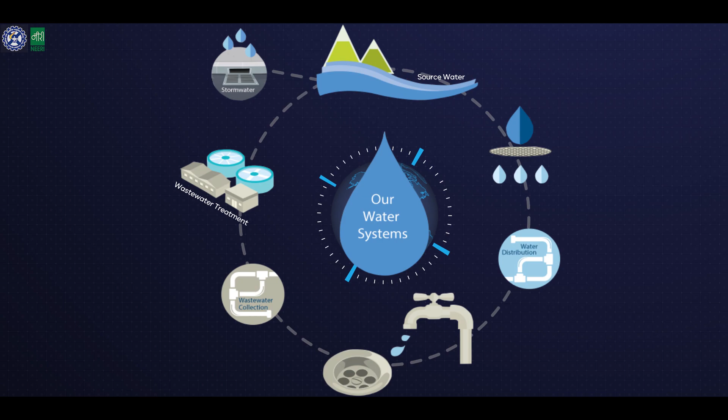Safe drinking water is a basic need to sustain human lives. To provide safe drinking water, we need a sustainable ecosystem in place. It includes raw water source, collection system, purification plants, storage facilities, and water distribution network.

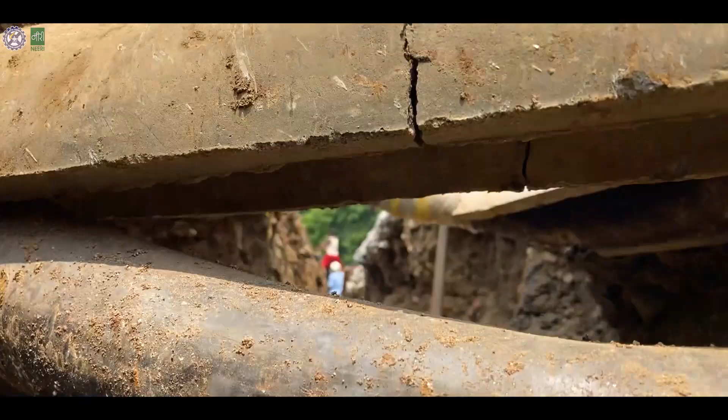Water distribution network in many cities is hundreds of kilometers long and is laid underground for several decades. Aging distribution network consists of various issues like corrosion, breakages, and leakages in pipes. Failure in distribution network causes loss of revenue to all the municipal corporations and water boards.

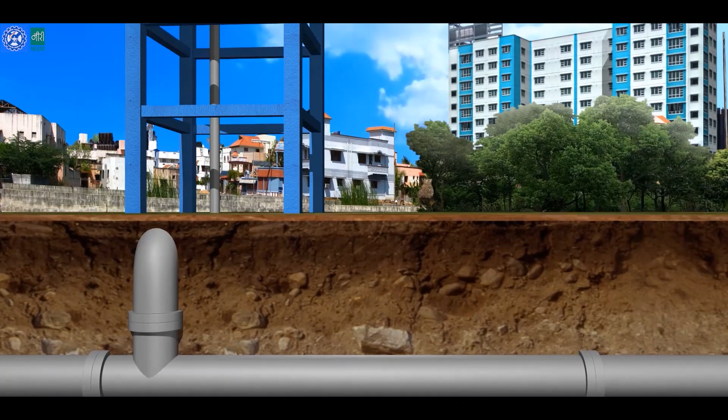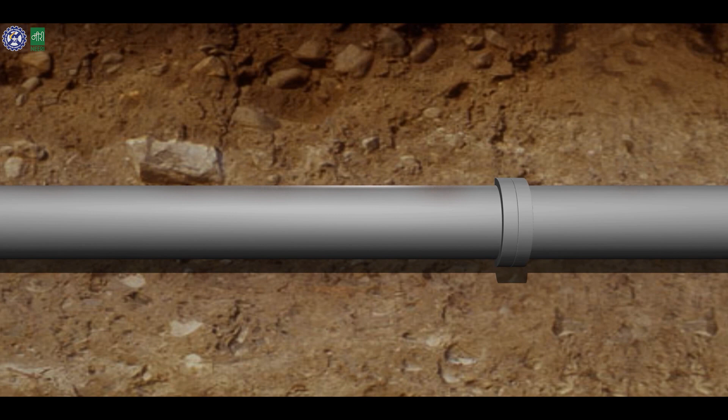Drinking water supply pipes are placed approximately 1 to 2 meters below surface level, while drainage pipes are placed approximately 4 to 6 meters below surface level. Due to soil and environmental conditions, these pipes get corroded. Their joints become loose, which makes them vulnerable to breakage and leakage.

Many municipal corporations in India have 40 to 60% non-revenue water because of leakage, breakage, and some other reasons. Due to lack of revenue, they practice 2 to 6 hours of intermittent water supply. Rest of the time, pipes stay empty, creating negative pressure, which results in contaminant intrusion into the water distribution network.

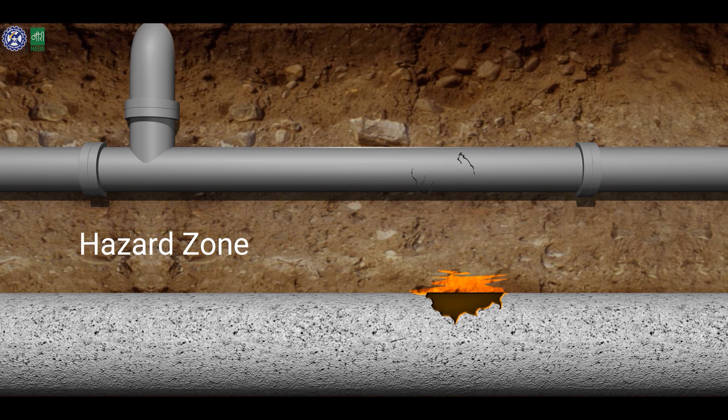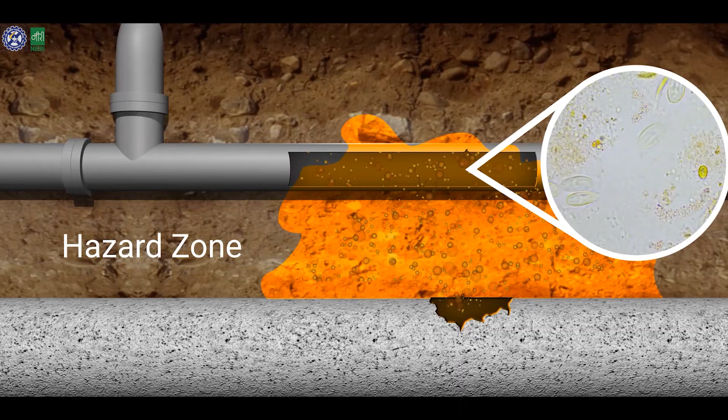The area affected by leakage of sewer lines and drains is known as hazard zone. There is a possibility that drinking water pipes may pass through the hazard zone. If there is any breakage or leakage, the chances are contaminants from hazard zone or other impurities present in the soil may enter into the water supply pipes during empty hours, resulting in supply of contaminated water, which gives rise to public health issues and ultimately results in loss of processed drinking water.

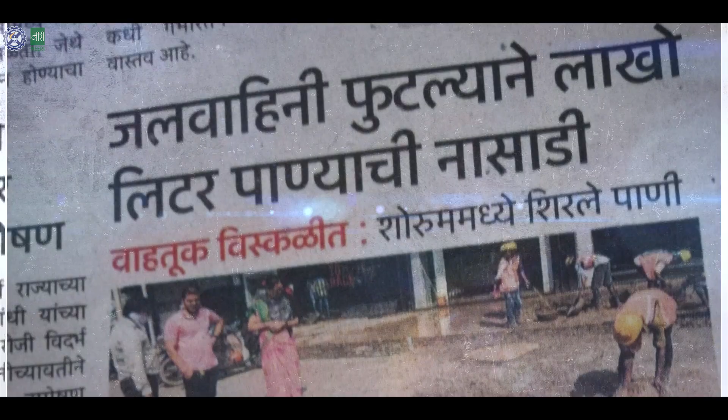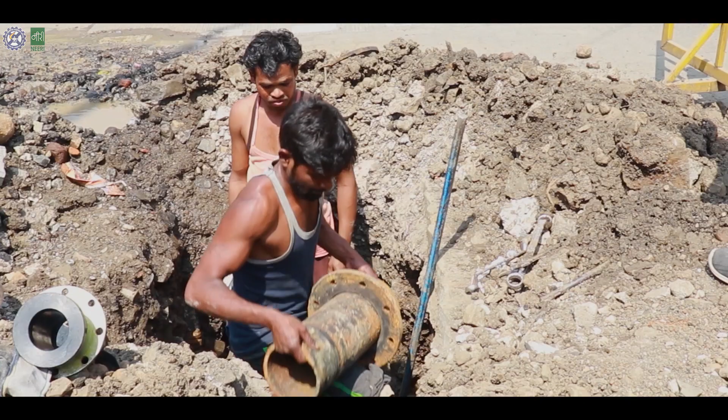At present, the municipal corporations have a lot of burden to maintain their water supply network. The approach they are following is a reactive approach. Whenever there is a complaint of leakage or contamination at the consumer end, they replace the pipe or they rehabilitate the pipe and they solve the problem at that level. There is no mechanism to identify the point of contaminant intrusion into the water distribution network.

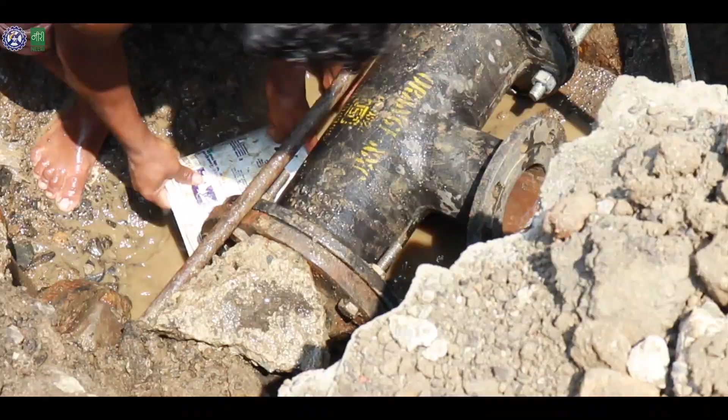Most of the time, corporation engineers are struggling to locate the source of leakage. There are complaints of polluted water supply, but for days together, they are not able to trace the source of the contamination. Most of the data that we have, we find that is inadequate. The condition assessment of the main pipelines is a big challenge, which comes out with an assessment of how much of the pipes are to be replaced, how much of pipes are to be retained.

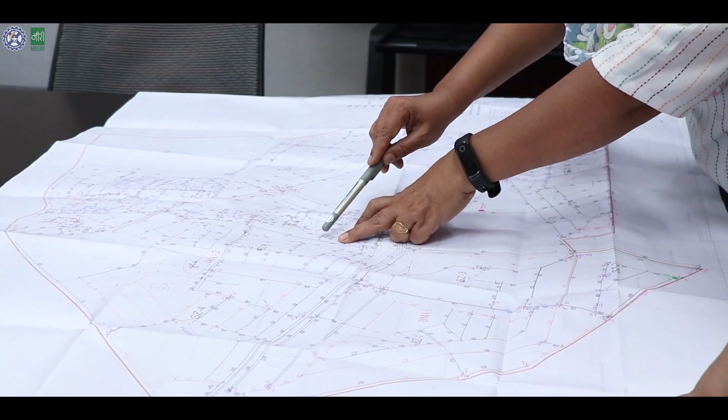So here we need to use such tools which will improve the service delivery as far as water quality and quantity is concerned. To address this issue and simplify the administration process of water distribution network, CSIR NEERI developed a software, RiskPiNet 2.0, a decision support system which is transparent, faster, and effective.

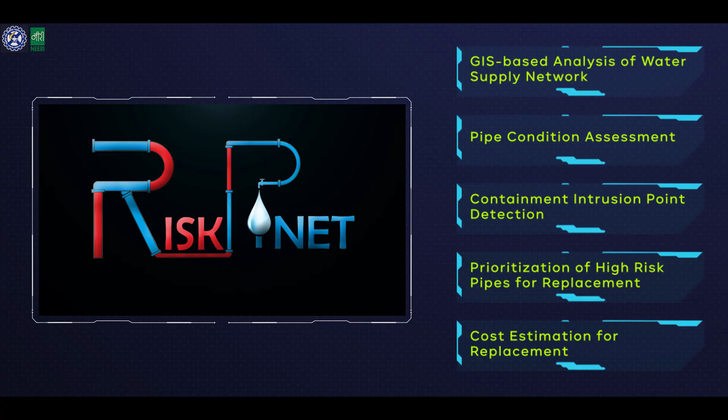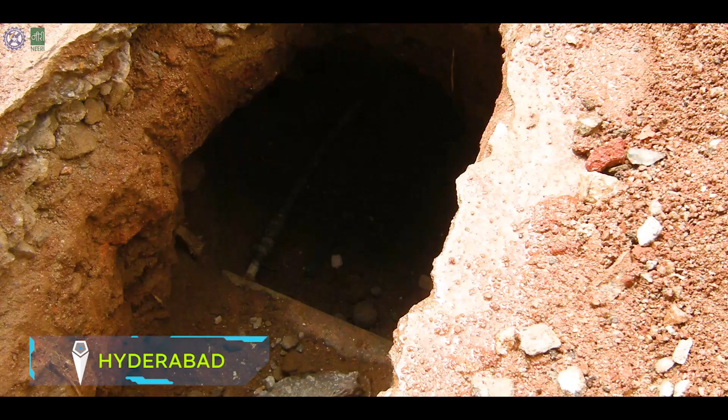NEERI is working on water distribution system since a long time. NEERI also designed water supply system and wastewater collection system for some of the cities in India. In Hyderabad, there was a problem of contaminant intrusion into the water supply network. It was thought that the entire water distribution network has to be replaced. But replacing the entire network is a huge task for cost and time consumption, and therefore development of water safety plan study was given to NEERI.

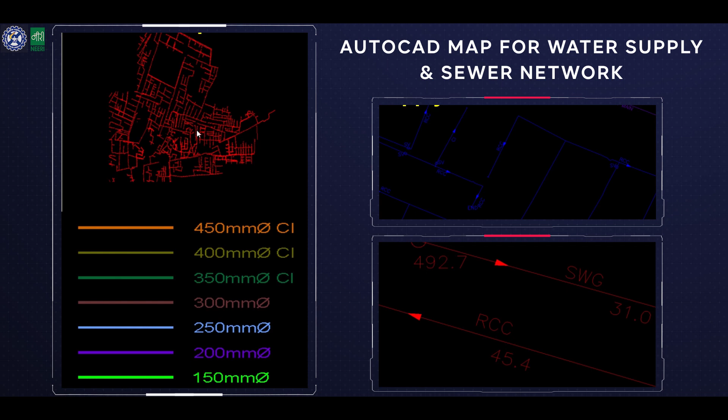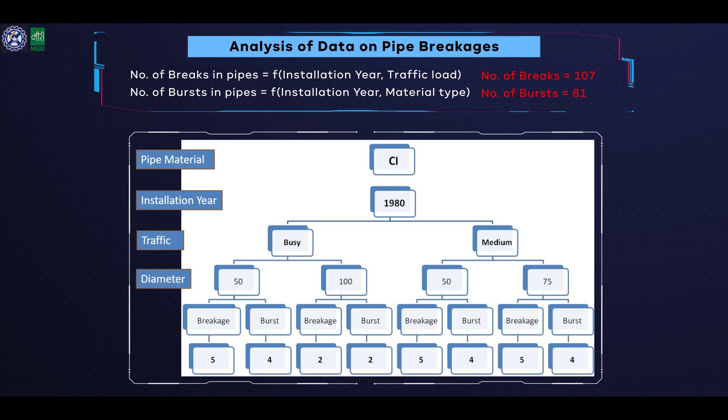And then we have studied the water supply network in Hyderabad. You can see we have taken GIS maps of water supply network, sewer network with different pipe material and diameter, and a lot of attribute data was collected and this was put to GIS analysis. We have done ground truth studies also for verification of data, and we identified the critical pipes in the pilot area which need replacement on priority.

And based on this study, we suggested a replacement plan to Metro Water Board. This study was very much appreciated by the Managing Director of HMWSSB at that time, and he said yes, this type of studies are very important and all pipe replacement programs should be formulated based on this type of study.

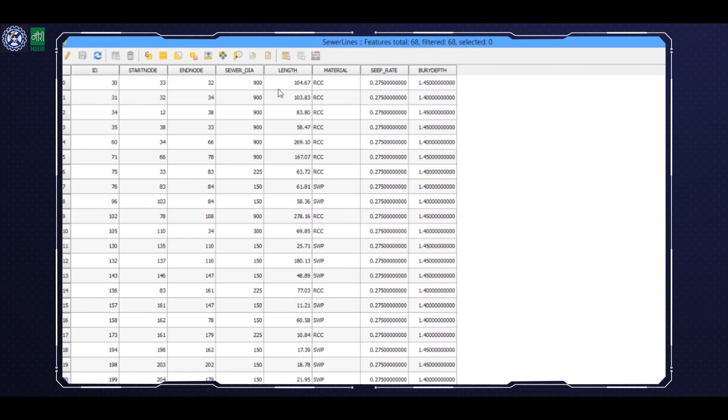After successful implementation of risk assessment module in Hyderabad under World Health Organization Water Safety Plan, team of CSIR NEERI developed RiskPiNet version 1.0. These Excel macros basically automate computation of pipe condition assessment, give vulnerability score, hazard score we have calculated in that, and also risk score we computed in Excel only. And after that, these results are imported in GIS format for visualization and analysis purpose.

What we are trying to do is we have developed a process called RiskPiNet, which is software driven, but it actually uses all hard data which comes from the corporations and councils who supply water. Using that data, it is possible for us now to predict where the contamination can happen and why can it happen and how it can be prevented. So it's a predictive tool which is going to be very robust and powerful to all the decision makers. Even the money that we spend in urban management can be well spent at the right time and the right place.

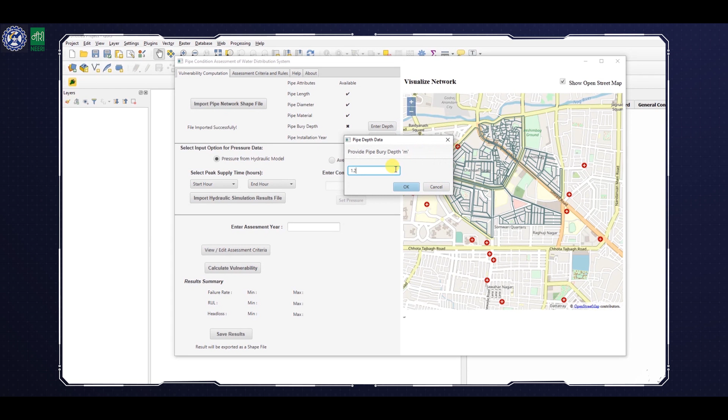RiskPiNet 2.0 version which we have developed has three major modules. First module is pipe condition assessment module, second module is hazard module, and third module is risk assessment module. Pipe condition assessment module computes vulnerability score of each and every pipe in a water distribution network based on pipe network data such as the year of installation, material of pipe, local traffic conditions, soil type, supply duration, etc. It also simulates hydraulic performance of water distribution system.

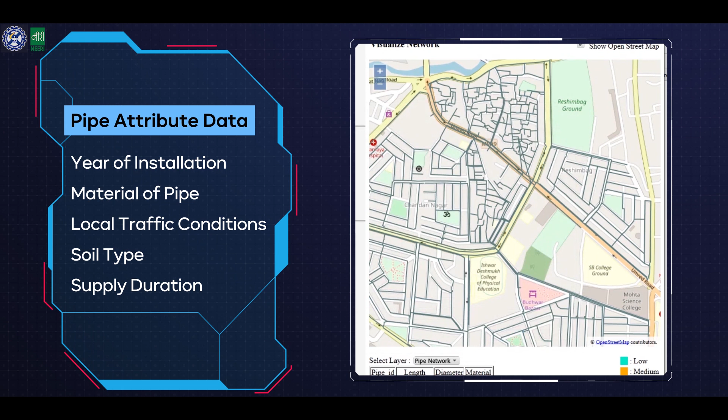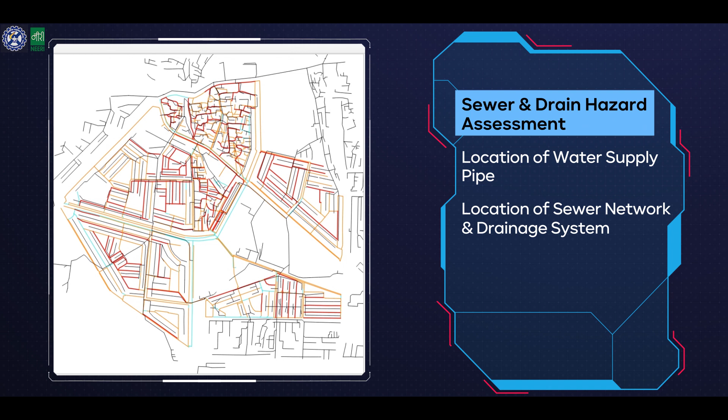Hazard module needs location of water supply pipes and sewer network pipes and drains, in addition to the inputs that are mentioned in pipe condition assessment module. This module provides hazard score for each and every water supply pipe based on its proximity to sewer pipes and drains.

Risk assessment module combines vulnerability score and hazard score to compute the risk of contaminant intrusion in each and every water supply pipe. It divides pipes in three categories. High-risk pipes are indicated in red, medium-risk pipes in orange, and low-risk pipes in sky blue color.

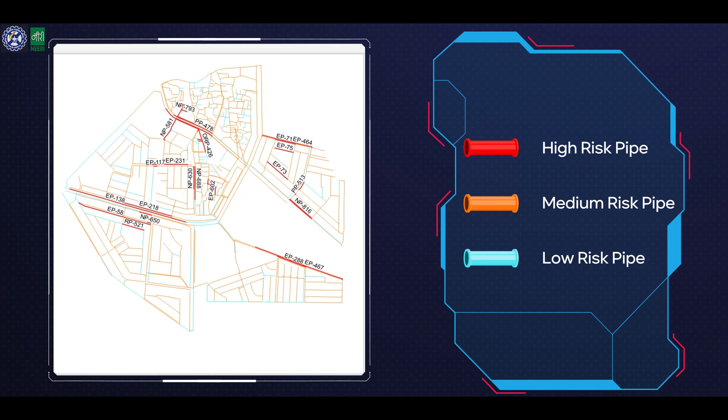There are two major challenges we face. First is non-availability of GIS data. Most of the municipal corporations or consultants do not have that data in a GIS format. Our second challenge is that if the data is available in GIS format, there is a lack of attributes. There are attributes like pipe installation year, bury depth, pipe length, the diameter. This type of information is not available, which is required for the processing of RiskPiNet 2.0 software.

And we plan to resolve this problem by developing an online portal to facilitate collection of data from various municipal corporations and then converting that data into GIS format, so that it is not only useful for RiskPiNet but it is also useful for other decision making.

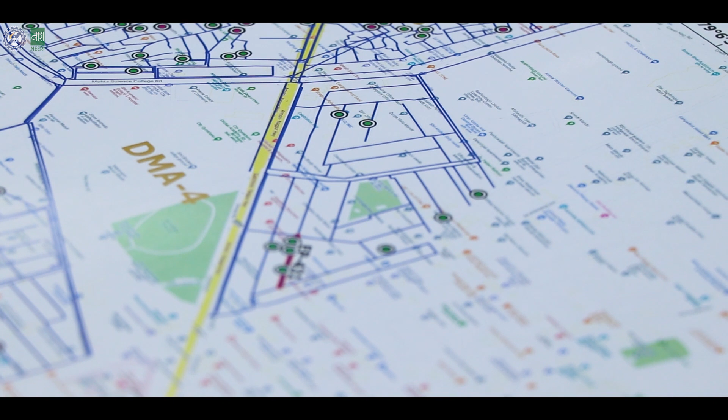CSIR NEERI team applied RiskPiNet 2.0 in Hanuman Nagar, Nagpur. Hanuman Nagar district metering area has 52.5 km length of water distribution network consisting of 800 different types of pipes along with the sewer networks and drains.

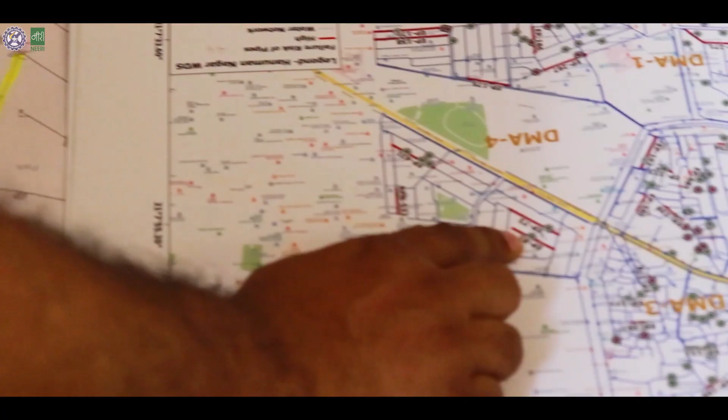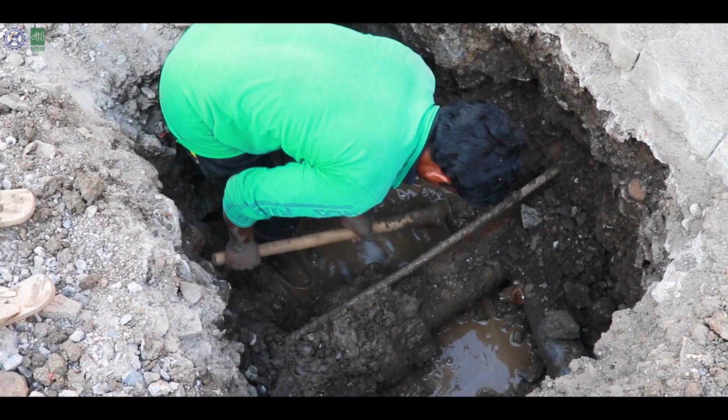Whatever the pipe we have identified using our software, it is showing a 100% result, that they also identify that these pipes are having some problems. Based on data collected from Nagpur Municipal Corporation and OCW regarding water distribution network, sewer network, drains and consumer complaints, RiskPiNet calculated vulnerability score, hazard score and provided risk assessment for contaminant intrusion in water distribution network.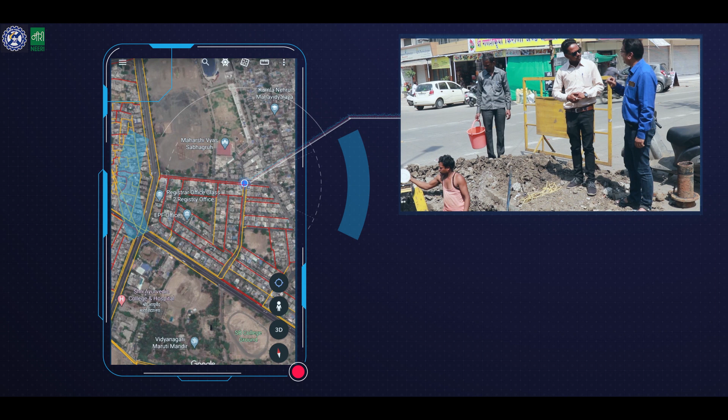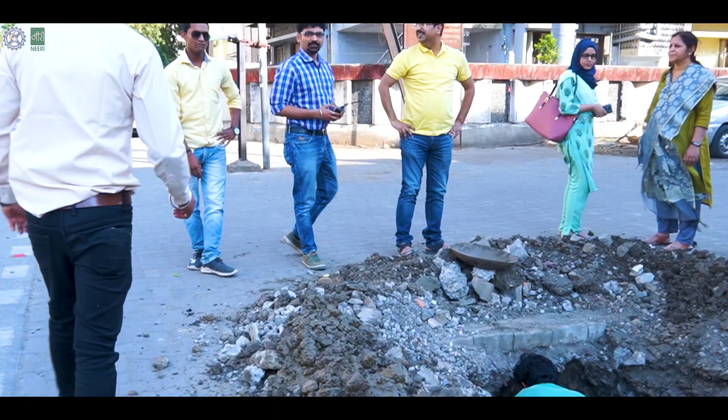In field verification, we actually go to the field, to those pipes which we identify as high risk. So we actually get a field view of whether our model is giving us a good result or not. We are getting near about 80 to 90% accuracy in our study area. So it is quite an encouraging result we get.

And as per our new standard, we are recommending that the NRW should be brought down to a maximum of 20%. And further, in this standard, we are aiming for continuous supply of quality water at adequate pressure. The minimum quality of water should be as per IS 10500 drinking water specifications.

The RISC-PyNet, the software which we have developed, has got two distinct advantages. One is that the non-revenue water for municipal corporations is generally 40 to 60% as of today. NRW strategies can reduce it by 50%. That means 20% of NRW can be saved. This is going to be huge revenue generation for municipal corporations and councils.

The second distinct advantage which RISC-PyNet software brings out is the strategic reduction in the cost of replacement of the pipes. Because when you replace the pipes without knowing which exact pipe to be replaced, there is an enormous cost. And if you are able to pinpoint each and every pipe to be replaced using this software, the cost of replacement of the faulty pipes is reduced by almost 40% to 50%.

The non-invasive techniques which are practiced internationally use acoustic signals to estimate the amount of average wall loss in a pipe. And these are practiced over sections of pipe. They do not give you information from node to node. But the decision support system or the desktop assessment like RISC-PyNet gives you the information about the pipe condition from node to node. This is the advantage of using decision support system for pipe condition assessment.

This work of CSIR NEERI has been appreciated by various municipal corporations and water boards. Urban ecosystem is fully dependent on tap water. Managing the distribution network efficiently is the ultimate way to make 24/7 water supply for every citizen possible. Because each drop is worth saving. Conserve water, conserve life.